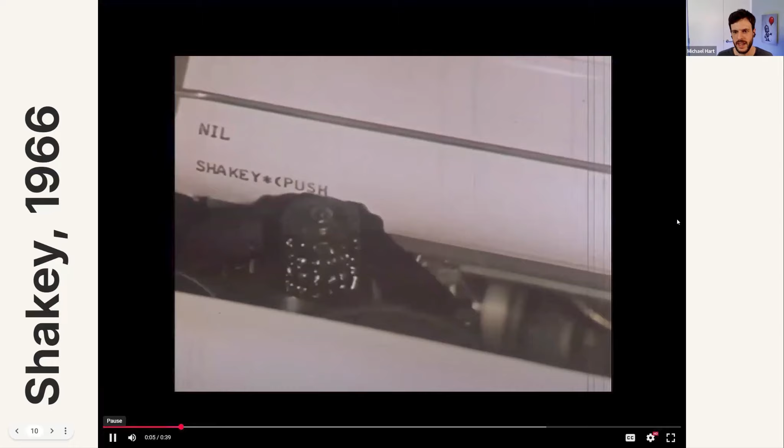And then it had some localization capabilities as well, so it could use its camera to take a picture of the corner of a room, find the border, and match it to where it thinks it is in order to reposition itself.

It also had some actions like going through a door, and it had task planning and breakdown. So from an initial state, it could figure out what actions it was possible to take, and then which path of those actions got to its solution state.

So in 1966 this was groundbreaking at the time, and this was how a robot could plan actions. It could even, if a box blocked a door that it didn't expect, reroute. So very cool stuff for then, although obviously very slow because they didn't have great computing power at that point.

So I'll take you through another couple of early robots. First is Freddy - this is to give you an idea of the progression of intelligence of robots over time. Freddy, which was roughly 1973 rather than '66 for Shakey, had the task of picking up pieces of toys from a pile and assembling them.

So you could jumble up - I think it was a boat and a car or something - those pieces were all jumbled together, and it could pick up those pieces and assemble them into the two structures that were there.

For perception, it could identify those pieces from a messy pile, which is not an easy task. For planning, it could figure out how to assemble them into a structure, and for manipulation, it could pick them up and place them in the right spot.

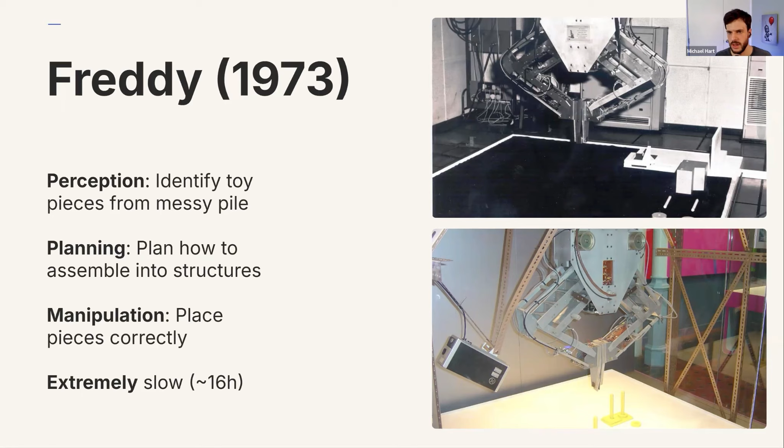At the time, this was extremely slow. It took about 16 hours to work, mostly because of the computing power available then. That was 1973. We're skipping ahead now to 1999, 26 years later.

This is Aibo, the first entertainment-type robot that hit the market. The top right is the earliest version of Aibo, and the bottom right is one of the more recent versions you could get.

It was able to perceive tones of voice from people rather than words - later models could do words, but at this point only tones. It could identify its toy pink ball, plan a movement toward it, and manipulate it by moving it around. It also had a button so a human could interact with it to give praise. Maybe manipulation is a bit of a stretch there, but I've included it as it's a physical interaction with the world.

And then the last example for now is Asimo. That's 2005, about six years later, and you can see in the top right the progression of Asimo through the years, getting into a slowly lighter and smaller form factor as compute power increased and robot technology improved. Bottom right is what it looked like. Its capabilities were quite hard to pin down, since it operated for a number of years and kept getting updates.

So these might not all be accurate for 2005, but it was able to recognize moving objects. As far as interacting with people, it could recognize postures, gestures, sounds people made, including words, and people's faces. From that, it could plan movements, face the person talking, or if it was in a pre-mapped environment with stickers on the ground to help it locate itself, it could navigate that environment.

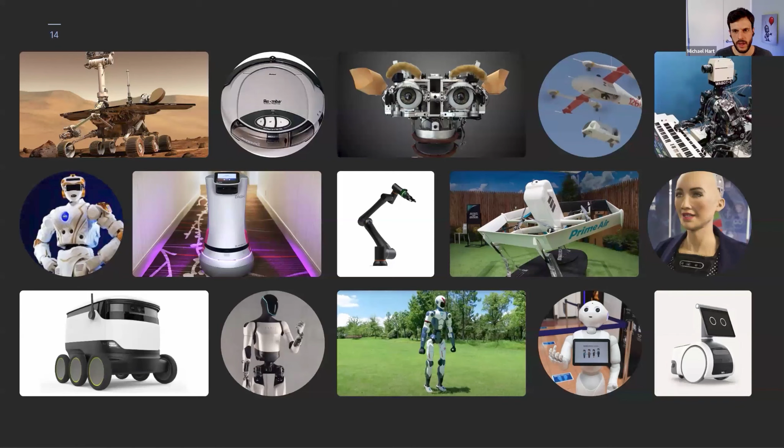To save you from an entire timeline of robots, I've gathered a few examples here. We can see the Mars rover, which was controlled by sending a series of landmarks from an operator on Earth, and it then had to navigate between them.

Roomba, I'm sure we're all aware of. Some of the emotional robots - robots intended to trigger an emotional response from you, or to show emotion in order to get you to interact with it more. And drones, robot arms, and so on.

The tech has improved over time, and here is kind of how. Here's how I see the AI breakthroughs from the original Shakey up until today. In 1970 to 80, so around '66 I think, Shakey was born. It combined control, perception, mapping, and planning all into one robot.

Now there's a good 34-year gap, mostly because of improvements in technology rather than a massive breakthrough. But around 2014 is when we started to see deep learning appear in robots - neural networks helping with perception capabilities, and reinforcement learning so robots that wanted to stand up could do that. We started to see things like robot dogs teaching themselves to get up using simulation training, and using reinforcement learning to figure out how to take those actions.

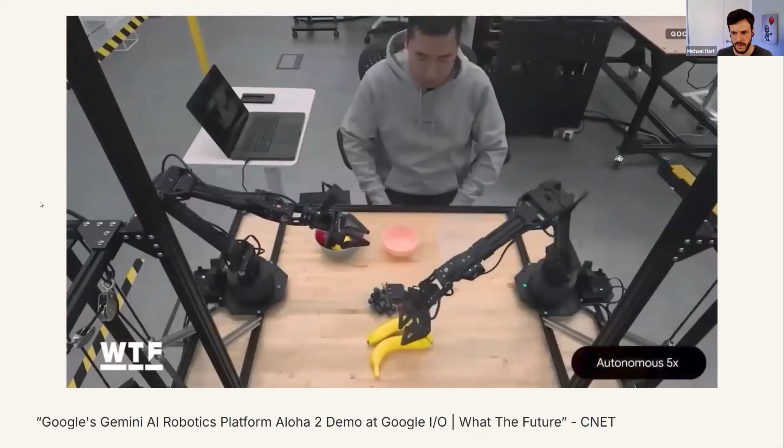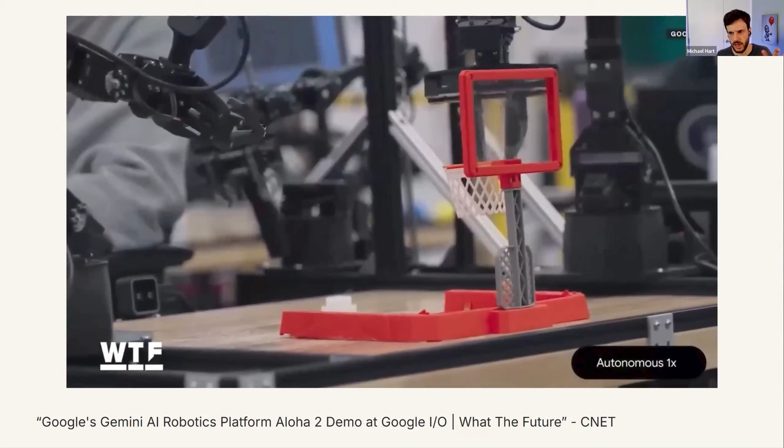You can see that it's able to identify the fruits and sort them into particular containers, zip a Ziploc bag shut, do origami, and dunk the ball in the hoop. Even with the sped up video, the arms are just slightly shaky. And then again, sorting erasers into containers.

When I saw this video, I was astounded. I think this was maybe last year, so 2024. We can see that an AI is able to control a robot to perform more advanced actions than we've seen before. Another example is from Helix, by Figure.

These two robots were asked to identify groceries they'd never seen before and work together to put them away. Again, this is sped up 2 times, and you can see that even sped up 2 times is pretty slow. Not to take away from how impressive it is—this is amazing.

They're able to perceive the groceries, perceive their environment, plan how to put the groceries away, including passing objects to one another to get their task complete, and manipulation—putting objects in a particular place.

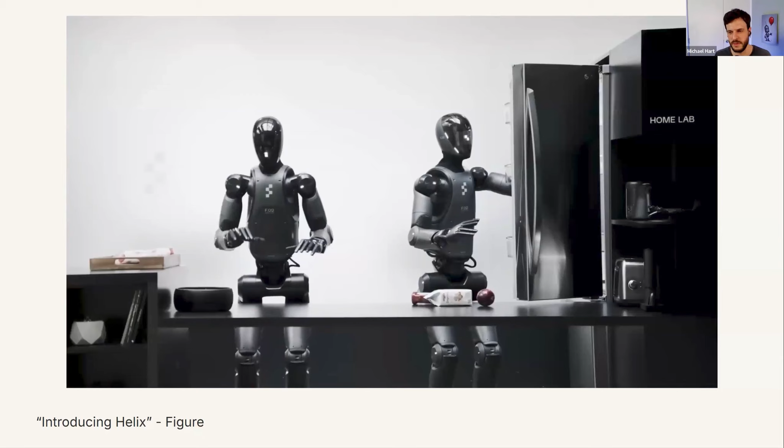I'd like to see how it performs with a fridge that's full. Can it move objects around to make space? But I think that's a question for Figure rather than to talk about here.

So those are what I would consider the state of the art of AI in robots. A bit of a summary of the 3 cornerstones of what we're able to do now.

Sensor fusion—we have some ability to combine data from different sensors. As Jofo was talking about, combining depth with RGB isn't something that's commonly done. VLAs tend to work on video only. So being able to fuse sensors is something we are starting to do now.

It's something we've done outside of AI for things like SLAM and mapping—SLAM being simultaneous localization and mapping. So we do have some sensor fusion, and we're making steps towards better sensor fusion.

We have natural language input now, which is incredible, and this is very recent. So we can actually tell a robot, go to the kitchen, and it will figure out how to do that.

And object detection and classification—for objects that it's seen before, and objects that are similar to objects it's seen before in training data, robots can identify what those objects are and interact with them.

For planning, we know that cars are pretty much getting to fully autonomous driving. We've seen behavior trees, which is a standard way to program robots to have particular routines and behaviors. We can see that robots have task breakdown, especially with LLMs.

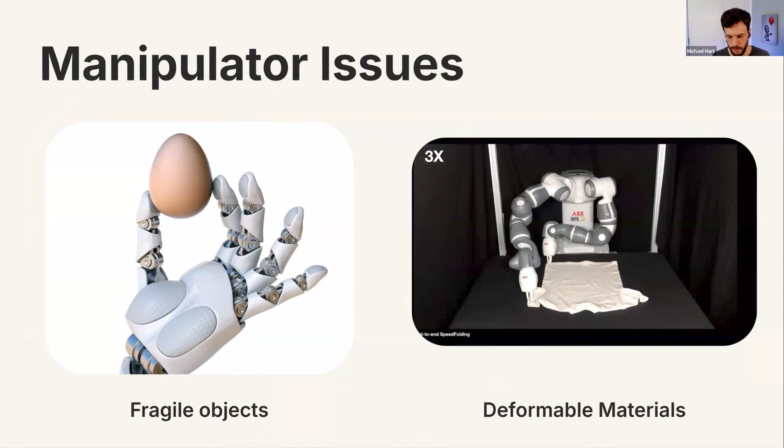We also have some joint limitations. Robots tend to have bulky joints using motors, which restricts what actions they're capable of. So even humanoid robots don't tend to walk very naturally because they've got big bulky joints compared to humans with lots of smaller muscles that can help correct and make motions smoother.

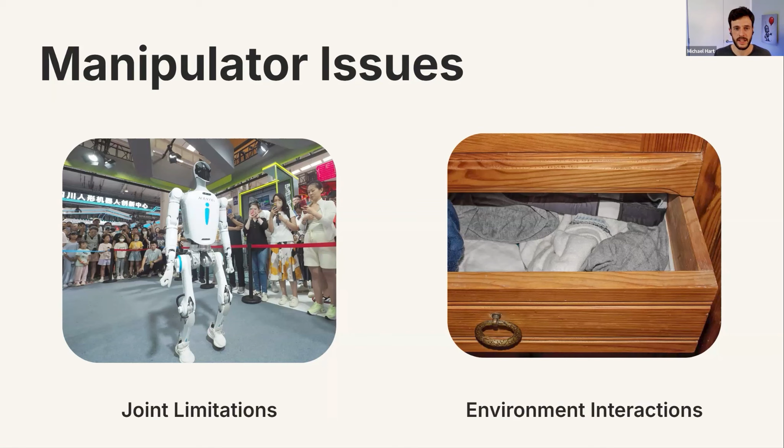And interactions with the environment, which is arguably AI planning - I've got a picture of a drawer here. If you imagine a robot is trying to shut the drawer and it shuts it slightly to one side and the drawer wedges, does it understand how to manipulate the drawer in order to correct that? That is something that is slowing robots down - an actual understanding of the environment.

Next is compute limits. As I was saying, can you fit a data center onto a robot? You can't. You can get a connection from a robot to a data center, but that comes with its own drawbacks, such as operating outside of network coverage meaning you've lost all of your AI capability.

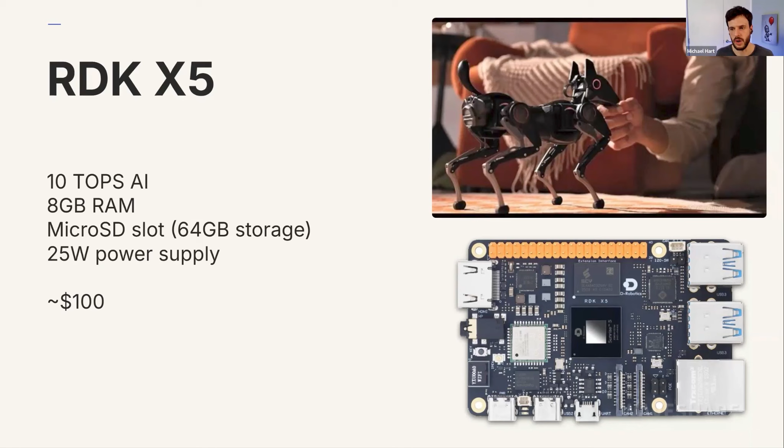But the thing is, a lot of robots are small. Like the one in the top right here, this is the Sirius dog. The RDK is embedded in its head, and there's no real room outside of that in the robot, and it needs to have some level of autonomous intelligence or autonomous actions via intelligence. So we can't do that with a Thor, we can't do that with a laptop - development kits are what we have. So what can we run on a development kit that size?

You would still use a board like this, especially because of the lower power usage. Lower power usage means less heat to dissipate, and it means your robot's battery will last longer. For a robot that is mobile and battery supported, you really need to be careful when designing the compute you use with it. The smaller you can go, the better, so long as it can run your intelligent application.

So with that, I've prepared a quick demo on the X5 that I have here. I'm going to stop that screen share. This is the X5 board that I have, and I'm running it with a stereo camera. I wanted to show a couple of vision models that can be run on the board so you can get an idea of the kind of performance and speed available. So if I run the first node, I need to refresh this and share the screen.

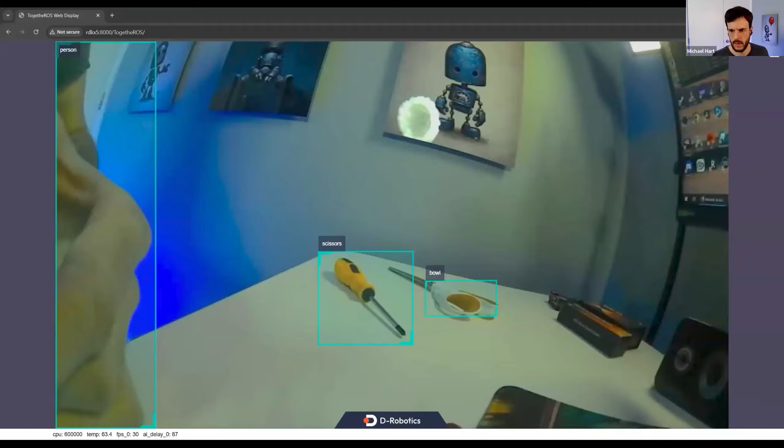Okay, here we go. That's hopefully coming through by now.

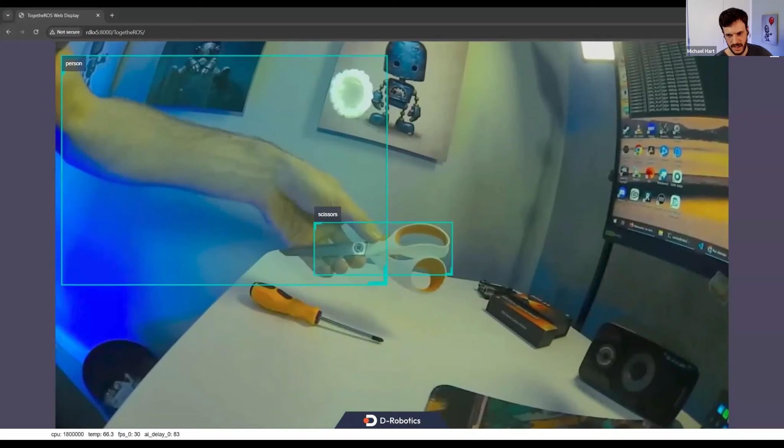This is running the YOLO 12 model, and you can see there's a couple of objects on my table. That's not a great demo because I don't have a lot of objects available, but you can see the scissors are being classified usually as scissors, but if they're slightly obscured, that could be a mouse, it could be an apple. But you can see that a board this size is able to run YOLO continuously and smoothly with very little delay. That's the kind of capability we can see.

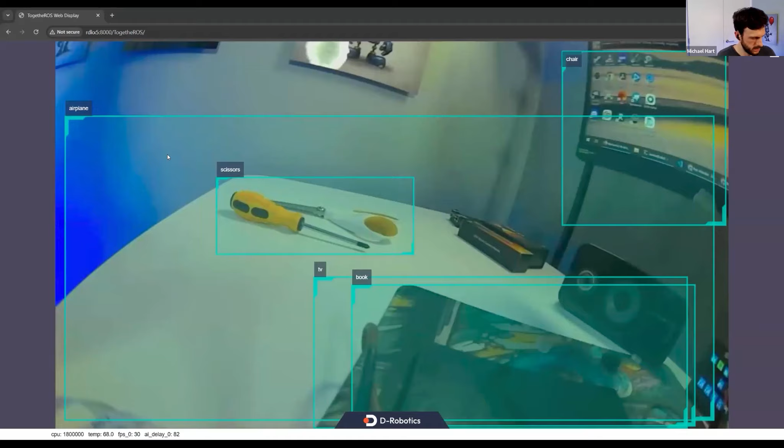To show you a bit more, I've prepared a few images, which is slightly cheating, but let me see if I can move this over. Excuse me. Here we go.

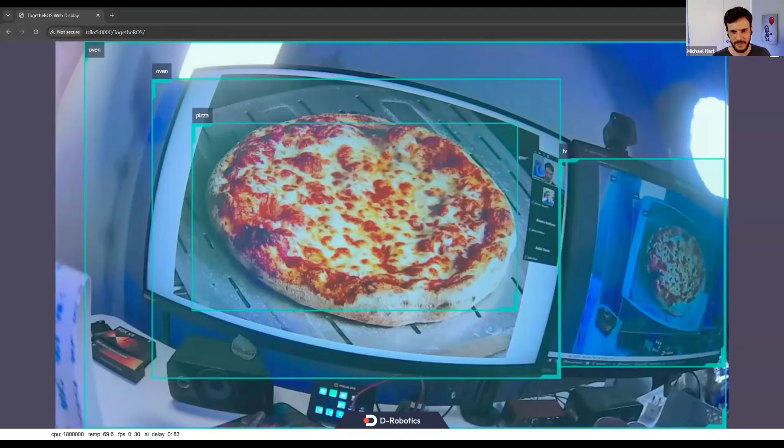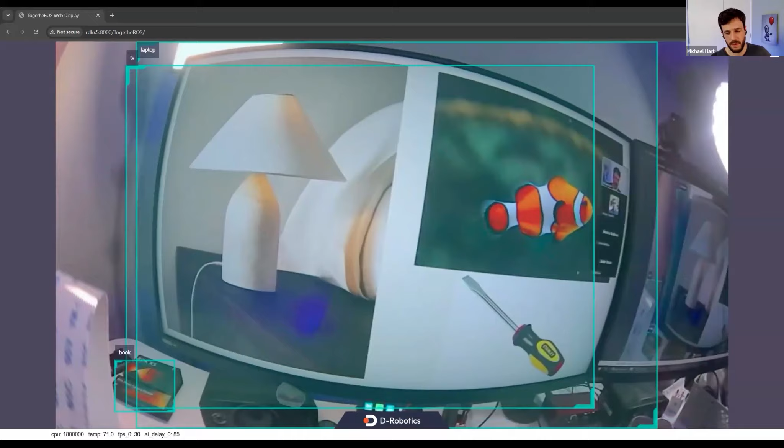Moving on to the next slide, it doesn't recognize very much. This is kind of the flaw in vision models that we have today, is that they're not very generalizable. If you want to add objects that the model can recognize, you tend to need to get more data and retrain the model. So that's all I'll say on that.

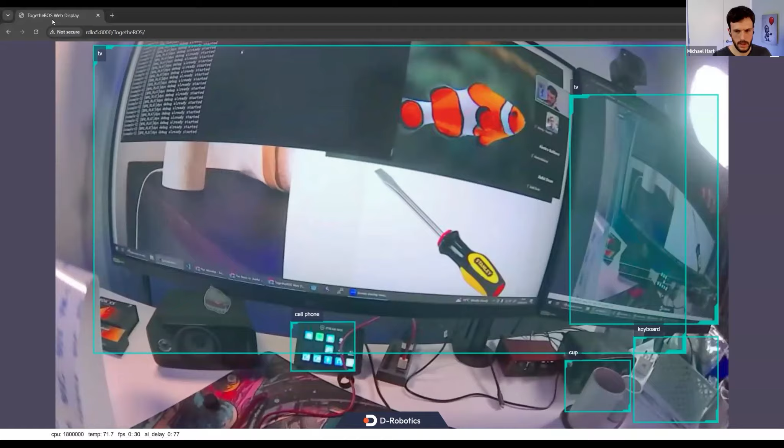I'll kick off the other demo, which is the stereo vision model. This model uses each lens and a neural network running on the AI chip on board. That's what's special about this board is that it's similar to a Raspberry Pi but has a dedicated chip for AI operations and it can run things like this.

So the latency is hard to show on camera. The latency is slightly higher. If I tilt it up and down on camera, you can see there's a few seconds delay before it works. That might be because I haven't set up the board with full performance scaling, but this still gives you an idea. Then it's estimating across a number of pixels on the grid the kind of depth that we're seeing.

At the moment you're seeing the depth to the wall, but if I hold my hand up in front of it, you can see that the distance gets smaller as I pull my hand in. So that's showing quite a high frame rate with also fairly high latency. But you can imagine that for a robot application, as long as it's not running full tilt, this is pretty much fast enough for it to work.

So let me stop the share of that and return to the presentation.

So the purpose of that demonstration was to show what even a small board like the RDK X5 is capable of. What it's not capable of at the moment is running larger models such as LLMs. I believe the company is bringing out more boards with more powerful capabilities, but at the moment, vision models are pretty good, audio processing models are pretty good, but when we start to get to larger models, that's when compute limits start to play a hard limit in what the robot is capable of doing. So if you want a small robot that is also intelligent, we are limited.

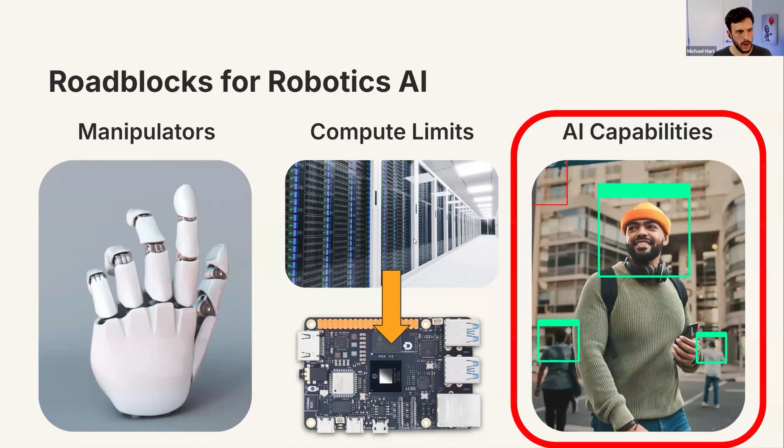Onto AI capabilities. I've got them grouped into perception, planning, and manipulation. So for perception, object recognition, as I was saying, if it doesn't already know what the object is, you probably need to retrain the model in order to figure out what the object is. I'm not actually sure how Helix put away groceries that it didn't identify. There might be some AI models I'm not aware of there.

Sensor fusion, again, so I have said that state of the art is that we're starting to do sensor fusion. Sensor fusion is difficult, especially when you've got objects like clear objects where RGB and LiDAR don't work too well. For a robot to be able to perceive its environment well, we still have work to do.

For planning, an understanding of physics is a big part of what's missing, in my view. So, modeling changes to the world. We can see the robot is taking a box off the top of the stack here. Would it know that if it took a box off the bottom, that the boxes would all tumble over? At present, probably not. And similarly, safety of its actions.

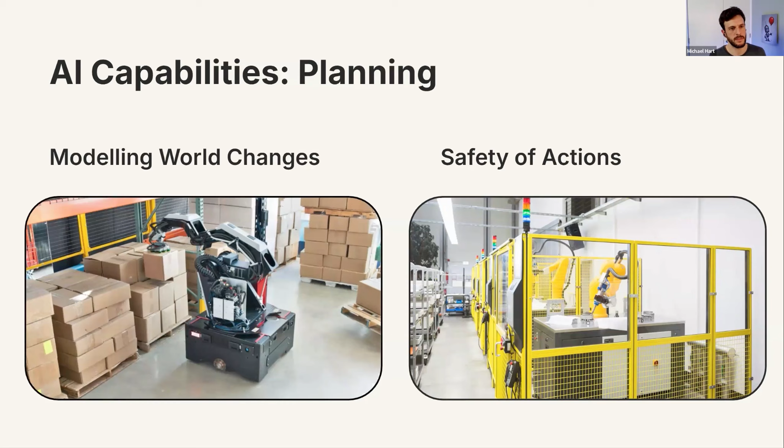So you can see robots doing soldering work within this enclosure. What happens when we have humanoids in our home? Maybe they're cooking a meal and they've got hot oil in a pan. Do they understand that moving the pan quickly risks spraying hot oil everywhere? This is something that we need to see going forwards, an understanding of the physics of the world.

And manipulation, so tool use. Generally with tools, robots need to be told in advance how the tools work—a CAD model of the tool and routines that show how to use it, or some kind of reinforcement learning. Robots are limited in their ability to pick up a tool and use it. If we can make this better, we can start to have robots operating tools inside the house, like a robot cooking with a hot pan of oil.

And again, complex objects. So the drawer example again, if it pushes it at slightly the wrong angle, it might not understand how to correct that. And that's just one example. There's lots of objects in the house where you need some degree of understanding of what it is in order to manipulate it correctly.

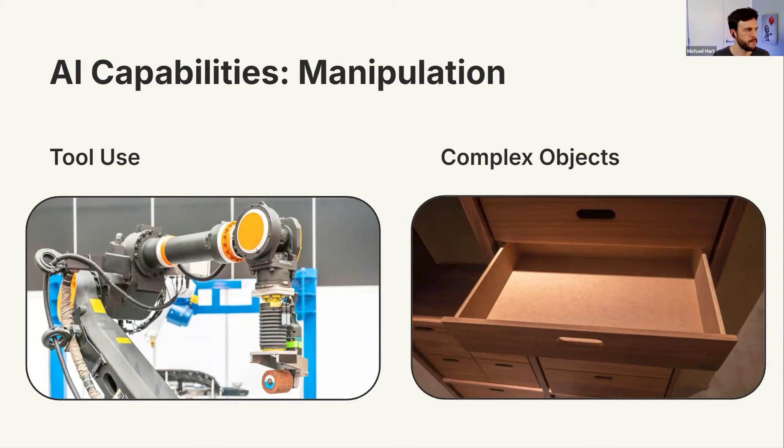Here's some other improvements that don't fall into one of my three categories. If we're able to reduce the number of repetitions needed to learn something—again I keep referring to Jaifei's talk, but it overlapped, so thank you Jaifei—after the base model was trained, it took around 30 repetitions to get it to learn a new action, which is great. That's the kind of improvement we'd like to see. So 30 repetitions is really good. Can we get that down? Can we do it without a base model that's been trained on more different actions?

Sim to real gap. Although we are able to train in simulation and run it on a real robot, there's still issues with that—it doesn't work quite as well as we'd like. The more accurate we can get that, the better able we'll be to teach robots in simulation and move it to real life.

And explainability. So why did a robot take that action? For things like VLAs, that's more of an issue because the AI is controlling the entire robot. We can't see how the data went from the camera through to an action very well.

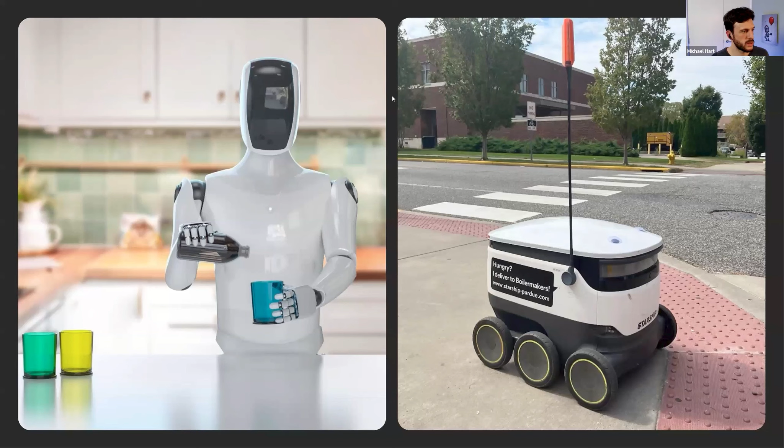So, where the road leads—I'm going to skim over this section quickly because it's mostly just speculation on my part. This is what I consider to be the potential near future of intelligent robots, if we can see improvements in those areas. So, a humanoid in the house performing tasks, which I would love to see.

I'd love to have a robot put my laundry on. And autonomous delivery robots, which we're already starting to see. And in the same vein, autonomous driving cars. These are things we are actively developing and seem to have a good handle on. Further improvements to AI will make those more of an everyday occurrence.

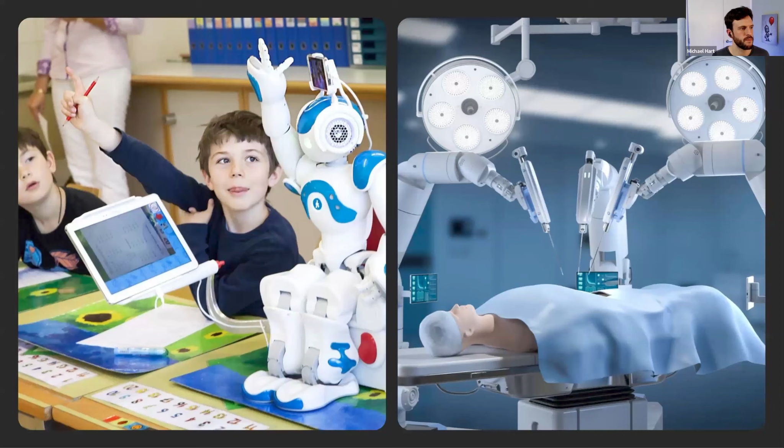Teaching and learning robots—so we have some amount of imitation learning already. If we make that more advanced, robots could learn better from humans and even teach humans. So maybe a teacher in a classroom.

Autonomous surgeries. So we do have surgical robots, which are great for helping surgeons, but we, to my knowledge, don't have fully autonomous operations yet. I think at some point in the future, we'll start to see operations completely autonomously performed by robots.

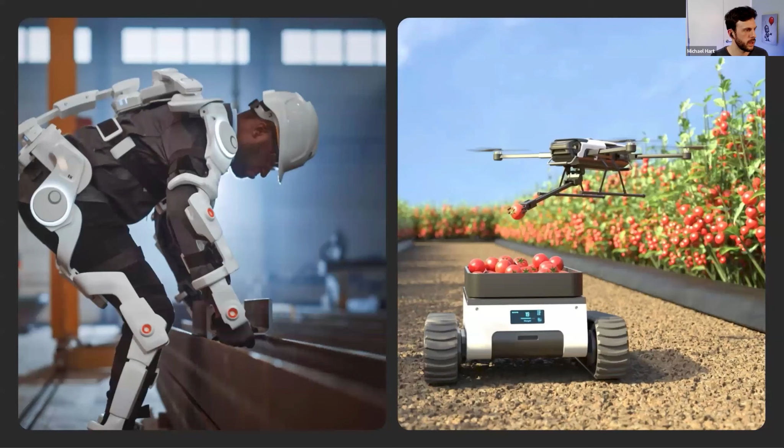Exoskeletons to help move heavy loads around—I think this is self-explanatory. And farming robots that would help identify ripe crops, pick them, bring them in, even replant crops or decide what crops go where. This is the kind of capability I think we can see.

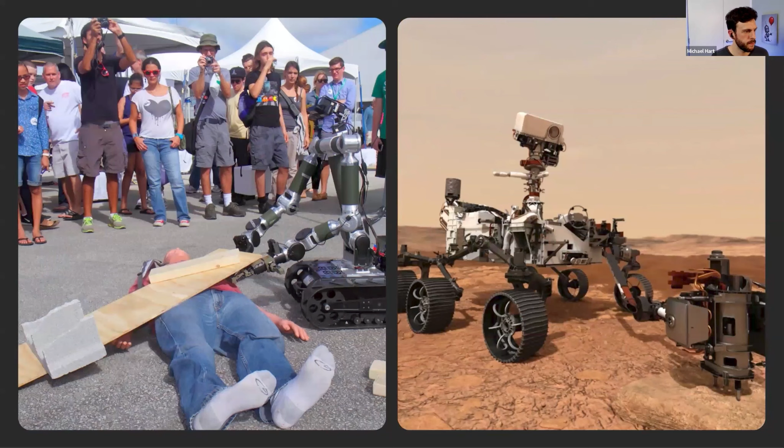Search and rescue robots. This is mostly limited, I think, by the understanding of physics in the world, because operating in an unknown environment where, say, a door is on top of the person you're trying to rescue, it's much better if the robot can understand how that works.

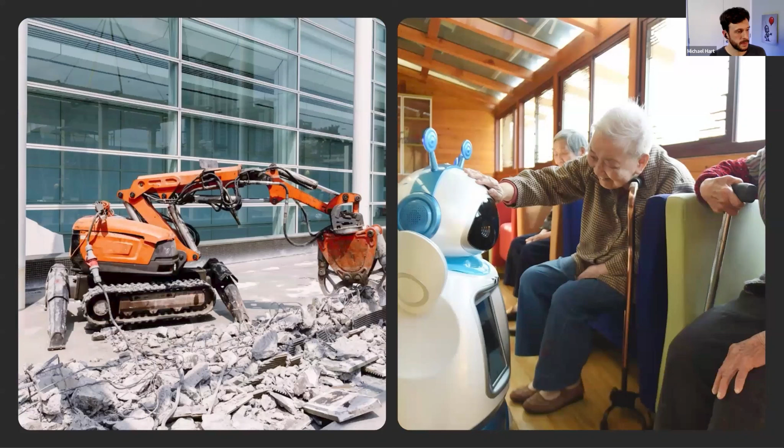And robots in space—we could start to see more autonomous operations from there, more autonomous exploration, more science experiments, maybe even start to construct in space. Speaking of construction, we should start to see soon, I think, robots starting to construct our buildings. We're already starting to see prototypes and startups doing that, and I think as intelligence improves, we'll see that more in the near future.

And finally, social robots—so for the elderly and for the young, robots that are able to play with them and interact more, and inspire emotional responses. I'm not sure 'inspire' is the right word there, but we should start to see these kinds of robots soon. So that's the current state of AI in robotics, in perception, planning, and manipulation.

And what I would hope to see in the near future. Does anyone have any questions?